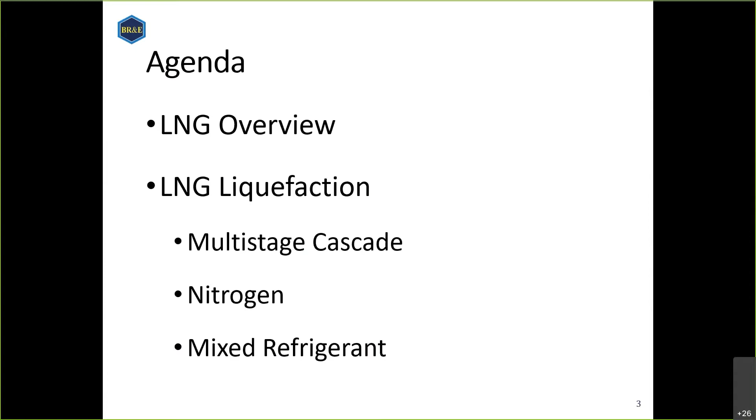So just to get us started, let's talk about the motivation for LNG. Why would we want to liquefy natural gas? The idea here is that gas is a very good energy source. It's clean, it has a much lower carbon footprint than, say, coal. The problem is it's not very dense. I mean, it's a gas, right? And so it's difficult to transport.

If you want to transport gas around and use it as a fuel, you need something like a pipeline to put it in and deliver it to consumers. And in many places, there's simply not a pipeline that you can put gas into. So the idea behind liquefied natural gas is that you can liquefy the gas, which reduces the volume by 600-fold. Once the gas is liquefied, you can move it to where it needs to be, re-vaporize it, and then send it to consumers through a pipeline at that point.

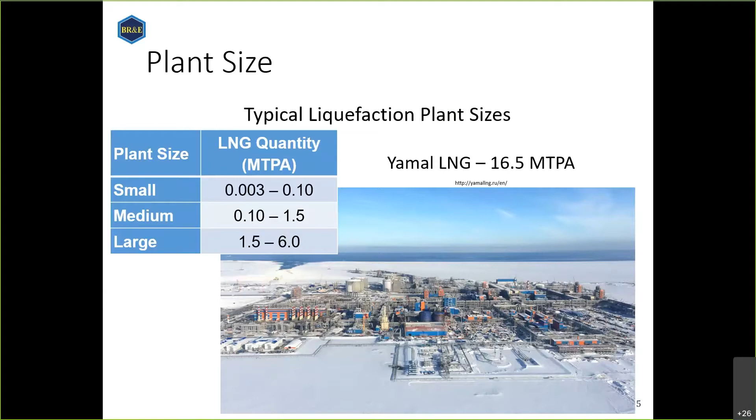Now, when it comes to actually producing the LNG, what are we going to have to do? We're going to start with gas coming out of a well, and we've got to think about two things. First, that gas is still going to need to meet our customers' needs. If we want to ultimately take this gas and put it into a pipeline for consumers or industry to use, they're going to have some specifications that we need to meet, things like the total sulfur content, the total water content, and the heating value. So we may need to do some processing to get those things in line.

For instance, for the heating value, we may need to do some dew pointing and remove heavy ends. The other thing is that because we're liquefying this natural gas, we're going to be operating at cryogenic temperatures, very very cold temperatures. That means there are some considerations from the processing side of things. One concern is that we could have solids form in our heat exchangers or piping during liquefaction because of those cryogenic temperatures. So we tend to be concerned about things like the carbon dioxide content, and in fact at the temperatures we're operating at, we can even see some hydrocarbons start to freeze out. We'll discuss this a little bit more in just a moment.

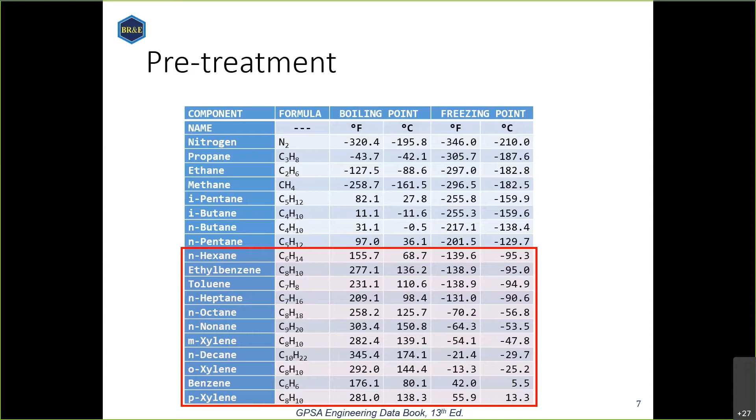And in ProMax 5.0, we've actually added a tool that lets you predict solids formation point for these species, for any species in an LNG process. Now, this is a brand new feature, and it hasn't been fully integrated into the Visio part of the graphical user interface. And so right now, this tool lives in an Excel spreadsheet.

Heating value is another thing that we've got to think about when it comes to the gas. We've got to remember that ultimately this gas is going to be put into a pipeline somewhere, and they're going to have some specifications on things like the heating value or the Wobbe index. If you haven't heard of the Wobbe index, it's basically the gross heating value divided by the square root of the specific gravity.

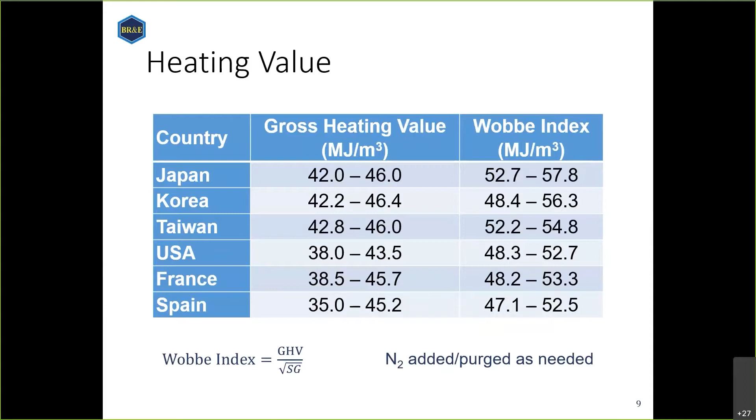And it's just a really good way to discuss the interchangeability of fuels. The idea is if you have a burner that's designed for a gas that has a given Wobbe index, you can use a slightly different fuel gas. As long as it's got the same Wobbe index, it should work just fine.

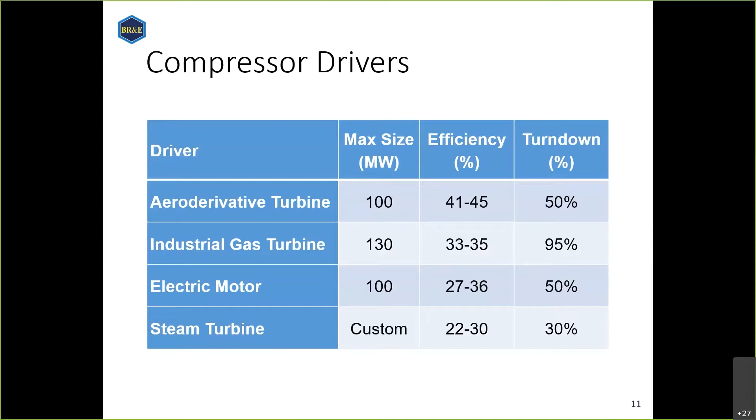Of course, cooling and condensing is also important. A lot of times these facilities are located on the seaside by the ocean, so seawater is often available for cooling, and that's pretty common in large-scale facilities. For instance, in that picture of Yamal LNG, you could see the sea in the background.

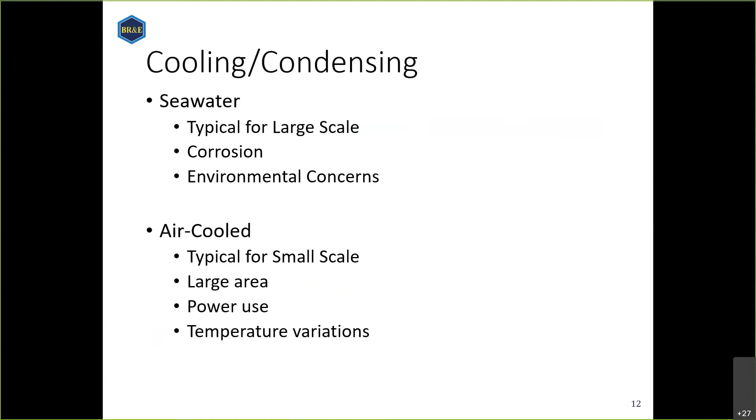Now, you can also use air coolers for cooling. That's fine. They do require perhaps a bit more power and they have a larger footprint, but both are used, both are possible.

For the expansion step, what we're typically going to use is an expansion valve, but there are some liquefaction processes that use turbo expanders. These are a bit more sophisticated rotating equipment, so more expensive than a valve. But it can be really useful if you've got a process where you don't have a refrigerant that condenses, like nitrogen. We're going to take a look at what a nitrogen liquefaction process looks like later today.

Now, when we talk about our heat exchange where the liquefaction is actually occurring, the liquefaction is going to occur in the main cryogenic heat exchanger. So you may see that referred to in the examples today as the MCHE.

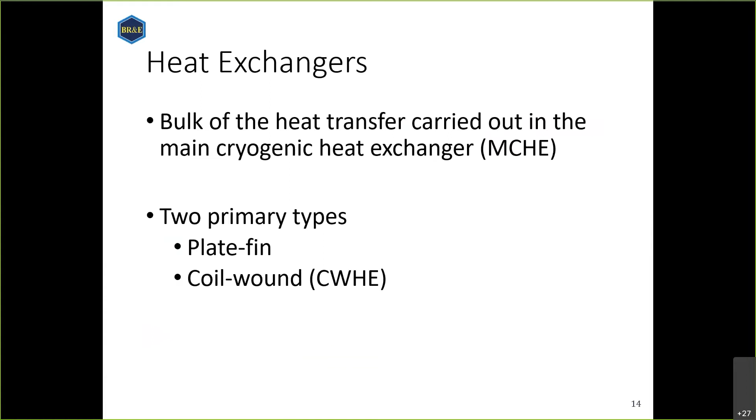There are really two types of heat exchangers that we use for liquefaction of LNG: plate fin and coil wound. Plate fin heat exchangers are sometimes also called cryogenic heat exchangers or brazed aluminum heat exchangers. These exchangers have very, very large heat transfer areas, and they're typically kept in a big insulated box that is very appropriately called a cold box. That cold box is full of some insulation like perlite and vacuum sealed.

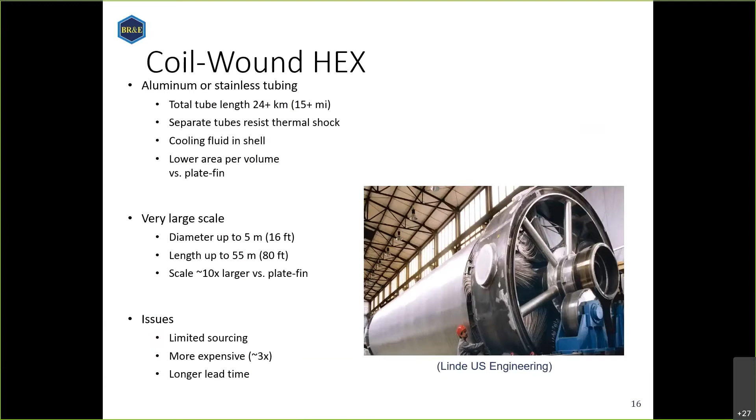Coil wound heat exchangers are also used, and they're more common in the larger facilities. The brazed aluminum exchangers are perhaps more common in the smaller facilities, and these are pretty amazing pieces of equipment. They're expensive, they're very big, but they're really impressive feats of engineering. If you just look at that picture, this is pretty cool, pretty cool exchangers. The bullet point up there points out that you can have 24 kilometers of tubing, which is just incredible. So anyway, we're going to do our liquefaction in the main cryogenic heat exchanger, and then after we've produced our LNG, we've got to store it somewhere.

So we've got a storage tank here. We're going to store the LNG at very low pressure, almost at atmospheric pressure, in an insulated storage tank. And there's going to be some boil off because there's a huge temperature differential between this fluid and the outside air and ground. It is insulated, of course, but we're still going to have some boil off.

But that's okay because we need that boil off gas to use for perhaps driving the compressors or as fuel gas anyway.

And then finally, we're going to have shipping. So these are just some ships that are used for transporting LNG. You can see there's different ways that you can design the tank. In the ship on the right, we've got spherical tanks. On the tank on the left, we've got more of a cube shape for the tanks.

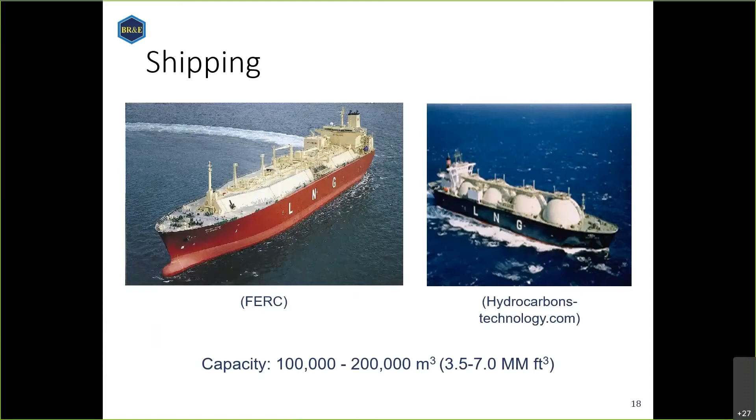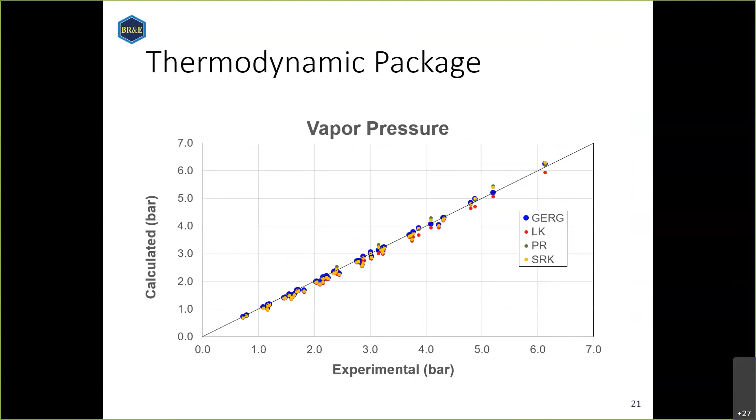The other limitation with GERG is that it's missing a component that we actually use a lot in LNG. Take a look at those components in the lower left-hand corner that are supported for GERG. If you can figure out what GERG is missing, let me know in the chat. I'll give you a few seconds to think about it. There's one component that's very important in LNG liquefaction that's missing. Do you know what it is?

The one that I was thinking of was actually ethylene. Now, ethylene is not something that we're going to have probably in our gas that we want to liquefy, but a lot of times we want to use ethylene as a refrigerant. And so if we've got ethylene as a refrigerant, that also makes things with GERG a little bit tricky. So there are some good reasons that we would want to use one of the equations of state.

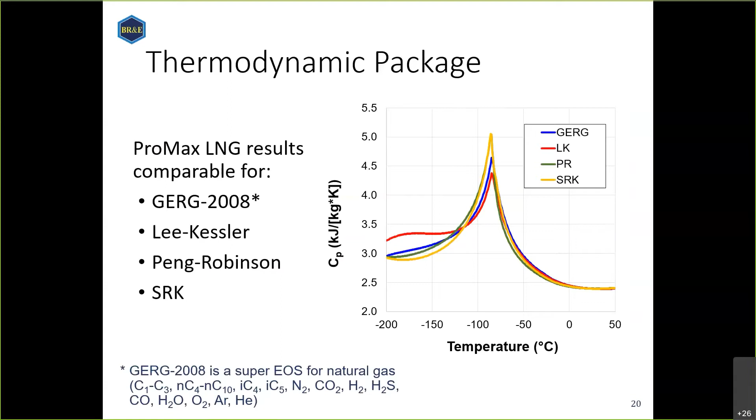And what we're going to kind of default to for the liquefaction here, I think, is at least in the examples that I showed you today, is Peng-Robinson. And if you look at how close Peng-Robinson tracks the GERG, again, at low temperatures, it makes good sense to use it. Okay, so here's the first process that I wanted to show you today.

Now, the first question is, why do we need multiple different refrigerants? And then the second question is, how did we choose these refrigerants? Well, the reason we need multiple refrigerants is simple. If you think about a propane refrigeration system, we couldn't liquefy natural gas using pure propane as a refrigerant, right? Because the coldest that we can get pure propane is about -35, -40 degrees Celsius, somewhere in that range. For LNG, the temperature that we're typically trying to target is about -155 degrees Celsius.

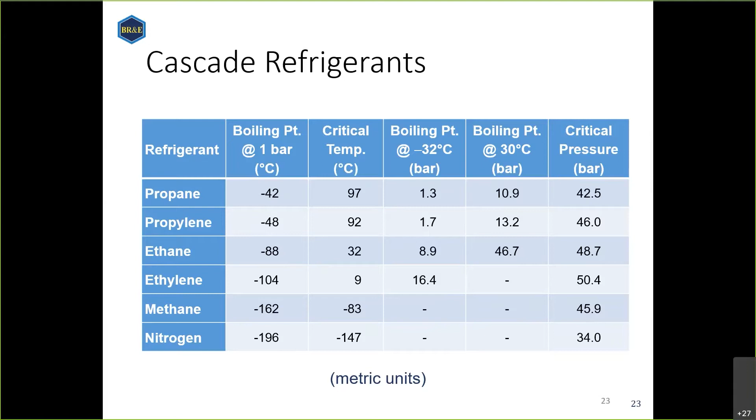For propylene and ethylene, that's not true—there's not necessarily going to be an ethylene cracker near our liquefaction facility. So what we're going to have to do is actually purchase that ethylene, bring it on site, and store and manage it. It's worthwhile for ethylene, but for propylene, typically it's not really worthwhile to deal with that. We'd rather just use pure regular propane, which is available and common. So anyway, that's the motivation for using propane, ethylene, and methane.

Now, the other option we have is the mixed refrigerant process. Rather than having multiple different refrigeration loops with methane, ethylene, and propane, we can create a mixture of methane, ethylene, propane, butane, and have a single loop. What that's going to do is give us a refrigerant curve that is no longer just a flat line, and we're actually able to get the heating and cooling curves to line up with each other.

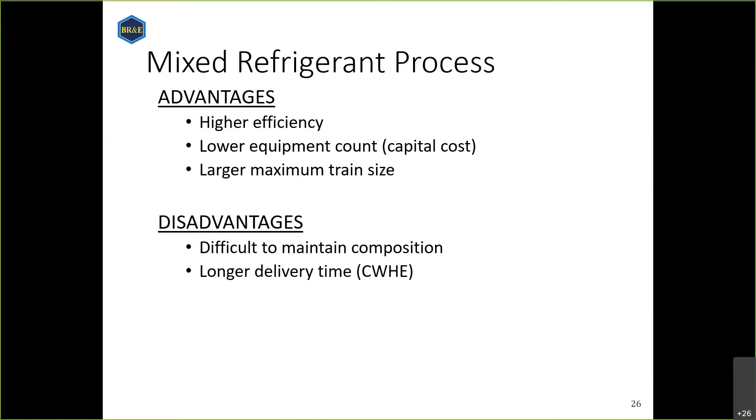The advantages of having a mixed refrigerant process are that we've got higher efficiency, we get those heating and cooling curves really close together, and we've got lower equipment count because we only need one set of compressors instead of 3. But there are some challenges: it's difficult to maintain the composition, and if we need to use something like a coil wound heat exchanger for this, that can introduce some problems.

But this is basically what a mixed refrigerant process would look like, and you can see this is much simpler looking than that Cascade process. Typically, this is going to be used for smaller facilities, less than 1.5 megatons per annum.

Finally, I've got a picture of the nitrogen cycle here, and this is a lot like the single mixed refrigeration process — we've just got a single refrigeration loop. Nitrogen's our only refrigerant, which means we've got one heat exchanger, so we get that benefit, plus the benefit of the Cascade process, which is that we only have one refrigerant to worry about — just pure nitrogen.

And nitrogen is something that's very easily available. It's in the air around us. I'm sitting in a bath of nitrogen right now, so you can produce your own nitrogen and use that to load your charge in the refrigeration loop.

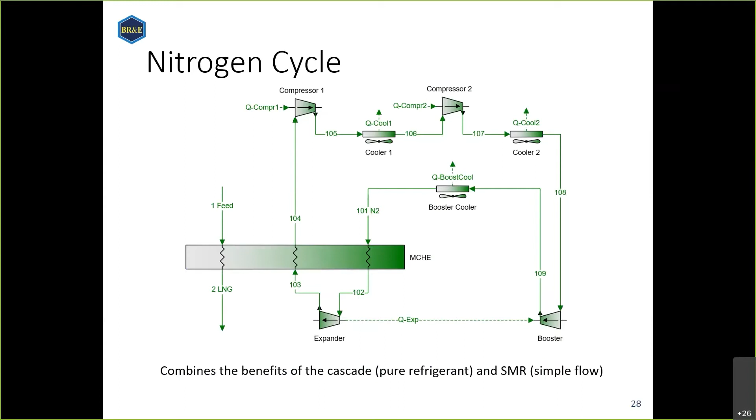The difficulty here is that, like I showed you on that table earlier, the nitrogen cycle is just not very efficient. One of the reasons is that it's kind of hard to get those cooling curves close together. With our mixed refrigerant process, we've got a lot of control over the heating and cooling curves — we can tune the refrigerant composition to get those curves really close together. But with nitrogen, we don't have that flexibility.

Nitrogen's curve is just going to be a straight line of constant slope because it's just sensible heating — there's no latent heat involved. And because those curves are so far apart at some places, the process ends up being less efficient.

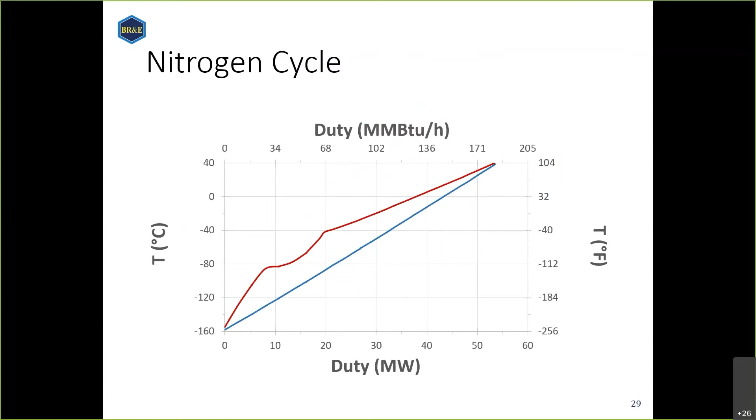Now, there are ways to overcome that. You can use something like this dual expander configuration, where we have a warm expander and a cold expander. In that case, you end up with 2 curves for nitrogen, and here we've managed to get these curves a little bit closer together, but you can still see that there are some areas where the curves are quite far apart.

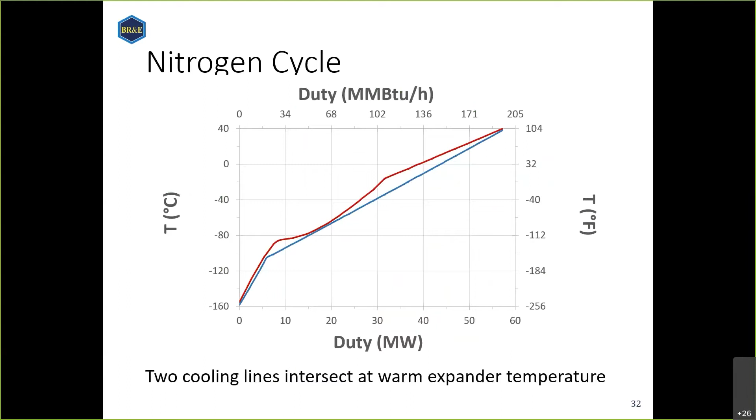So we're going to take a look at all of these in ProMax now and see what it actually looks like in simulation. The first thing I want to show you — I've got a blank ProMax project here, and I'm going to open an LNG example. We've got a huge library of built-in examples always available for you to reference, and they're also good starting points for your own simulation work. I'll show you how to get to those: go up here to File, and then click on ProMax.

And from here, I can click Open Example Project, and this is going to open our examples library. In the example I'm going to look at, I'm going to go into the folder midstream, and then into the LNG folder. You can see we've got several different examples here. We're going to be looking just at these examples today.

The first one I'm going to show you is this LNG Cascade process. Let's open that up. First of all, I'll help get you oriented. We've got our feed here, so this is going to be our gas stream that we'd like to liquefy. You can see that we've got a flow rate of 1 megaton per annum. We're coming in at 50 bar and 40 degrees Celsius.

And if I open this up, we can just take a quick look at the composition. You see that we've got 88% methane, 7% ethane, 3% propane, a bit of butane, and some nitrogen.

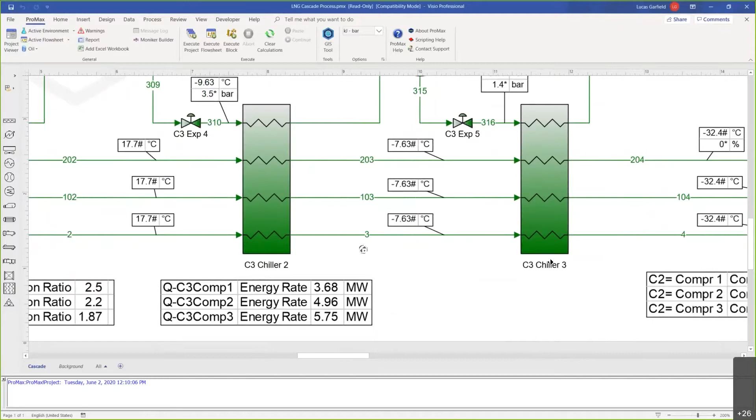What we do is we go through multiple different exchangers, getting cooler and cooler each time. So we go through our propane chiller, that takes us down to 17.7 degrees Celsius. We go through a second propane chiller, that takes us down to negative 7.63. We go through a third propane chiller, that takes us down to negative 32.4.

We continue on through 2 different ethylene chillers, that gets us down to negative 96. Finally, we go through 3 methane chillers, we get to a final temperature of negative 155 degrees Celsius. And then we flash down to our final storage pressure of 1.4 bar absolute. You can see that that ends up, if I open that stream, vaporizing just a little bit. So there's about a 3.3% end flash here, and our final temperature is about negative 158 degrees Celsius.

Now, this is a lot more complicated than what I showed you on the slide. The reason for that is because we're actually using economizers in our refrigeration loops. In fact, here in our propane refrigeration loop, we have 2 different economizers. It's pretty common on simple propane refrigeration skids to have 1 economizer. Here we actually have 2.

If you're not familiar with what economizers do in refrigeration processes, the idea is that we're mostly interested in using the latent heat of this refrigerant. So the actual refrigeration process occurs isothermally at whatever temperature we expand the gas to. As we expand the refrigerant, it's going to liquefy, and then we're going to extract the latent heat from the liquid, but that all occurs at constant temperature. And the idea here is that because we know we have to recompress, we don't really want to spend energy compressing refrigerant that doesn't get used for cooling.

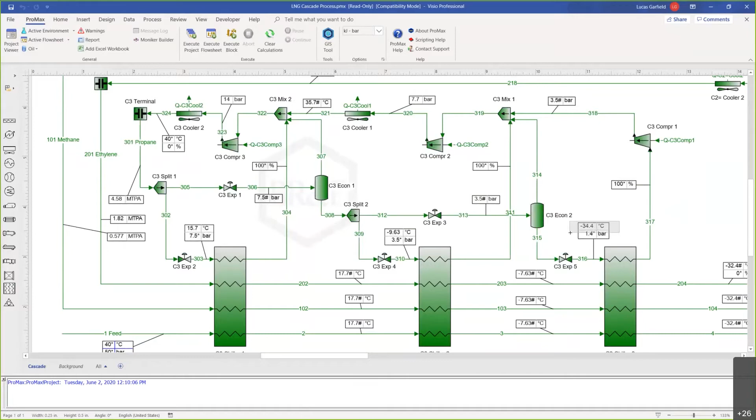And here we're actually expanding to 2 intermediate pressures. We're expanding to 7.5 bar, which drops us down to 15.7 degrees Celsius — again, this is for propane — and to 3.5 bar, which drops us down to negative 9 degrees Celsius. And then finally to 1.4 bar, which drops us down to negative 34.4 degrees Celsius.

We set the exchangers up based on approach temperatures. What we're assuming here is that we have a cryogenic heat exchanger, so this would be, for example, one of those brazed aluminum heat exchangers. We'll assume that we can get a very good approach temperature, perhaps 2 degrees, and we've configured this model to have 2-degree end approaches.

Let's just take a look at the first propane chiller and see what I mean. If we open this up, then go to the Process Data tab, and click here on Heat Transfer, you can see that we've got a minimum end approach temperature of 2 degrees Celsius. Let's take a look at the plot for this exchanger and see what that looks like. I'm going to click here on Heat Transfer, which is going to show me the 2 curves together, and I can see that, indeed, I've got that 2-degree approach on the cold side.

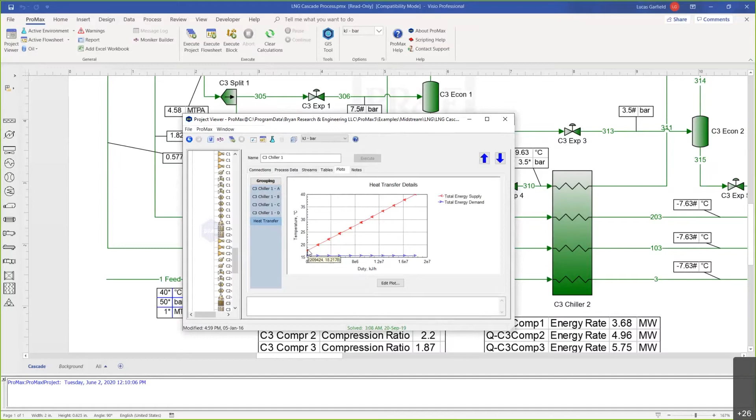The propane, our actual refrigerant that's entering the system, it's here in stream 303. Its temperature, 15.7 degrees Celsius, is entirely a function of the pressure that we expand to. We've chosen to expand to 7.5 bar, and I know that because there's an asterisk here in this callout.

The asterisk indicates to me that the user has defined that value. In fact, if I open this stream, you'll see that the pressure is here in blue. Again, in ProMax, blue indicates that the user has defined this value. And the temperature is just a result of the expansion, so we end up at 15.7 degrees Celsius here.

To get our 2-degree approach, we set the temperatures in each of these outlet streams to 17.7 degrees Celsius, assuming we get that 2-degree approach. Just to zoom out so you understand what all of those streams are: one is the feed, which is being chilled, but we're also chilling our methane refrigerant and our ethane or ethylene refrigerant.

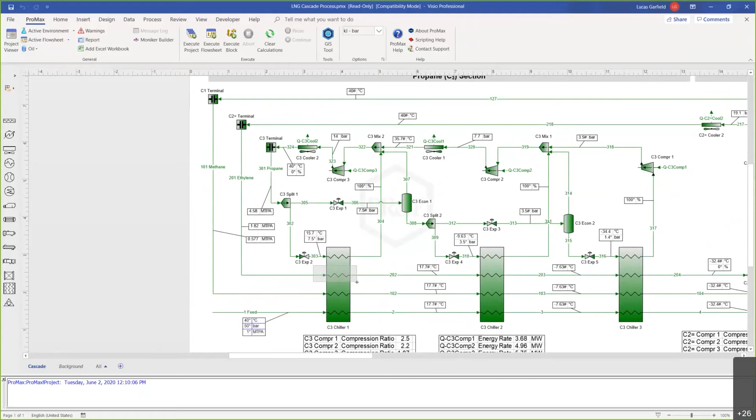The way that we set these temperatures up is using simple specifiers, which are a type of calculator in ProMax that can set one value based on the value of something else.

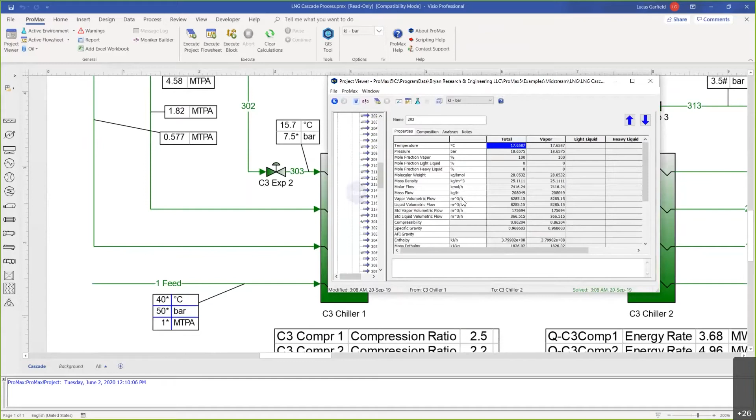If I open stream 202, the reason I can immediately tell these are set using a calculator is because there's a hash mark or pound sign on the callout. That indicates to me that a calculator is setting this value. And indeed, if I open stream 202, I see a solid blue background under the temperature, which is another clue that a calculator is here.

When I right click on this value and click show calculator, that's available because the background is blue — there's a calculator installed. If I look at what this is doing, this calculator takes a look at this independent variable, C3 chiller 1 temperature natural gas, and if I hover over it, a pop-up comes out.

This is a local reference to the temperature of stream 2 — you can see that in the pop-up that comes up. So basically what this calculator is doing is saying: set the temperature of this stream, stream 202, equal to the temperature of stream 2.

Similarly, if I open stream 102 and look under its temperature field, right click again and click show calculator, we have the same reference — it's referencing stream 2. So I have a calculator on stream 202's temperature that sets it equal to stream 2's temperature, and a calculator on stream 102's temperature that does the same.

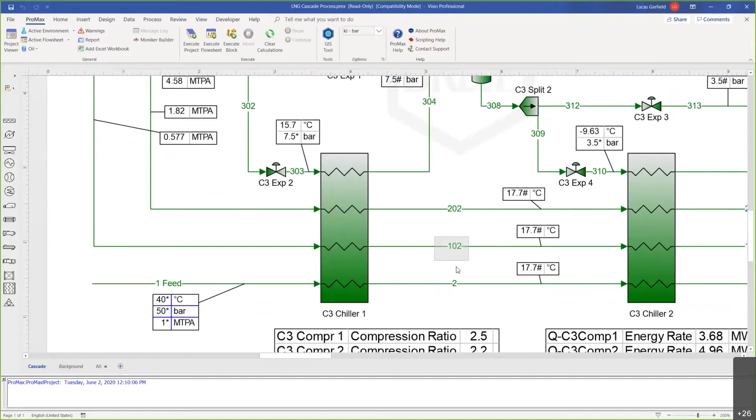Then if I open stream 2 and right click at its temperature, here it's set up a little differently. The variable here is actually taking a look at stream 303's temperature. If I hover over this, you can see it's pointing to stream 303's temperature. Then we add our desired approach to that value and set that as the temperature for the stream. Now this whole system is fully automated.

I could do something, for instance, like instead of expanding to 7.5 bar, expand simply to 8 bar instead — all of those temperatures would update for me automatically, and I would still have my 2-degree approach. So you can see now, when we expand to 8 bar, we're getting to 18 degrees Celsius here, and these temperatures have all updated automatically.

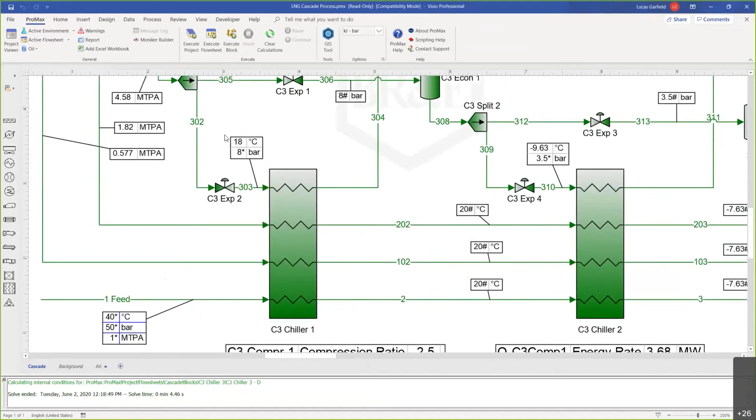So once you set those specifiers up on your outlet temperatures on your heat exchanger, everything is handled for you automatically, based in this case on what we've set as the expansion pressure here.

Now, what if we wanted to look at the complete grand composite curve? I showed you the composite curve for this individual exchanger when I opened it and went to the plots tab, but what if I wanted to see all of those curves overlaid on each other? We've got a lot of exchangers here — 8 different exchangers.

Well, we have a tool for that. It's located in what we call our property stencils. Basically, these property stencils are tools that run on top of ProMax and execute scripts that we've written, and we've written a stencil that produces the grand composite curve for this exchanger.

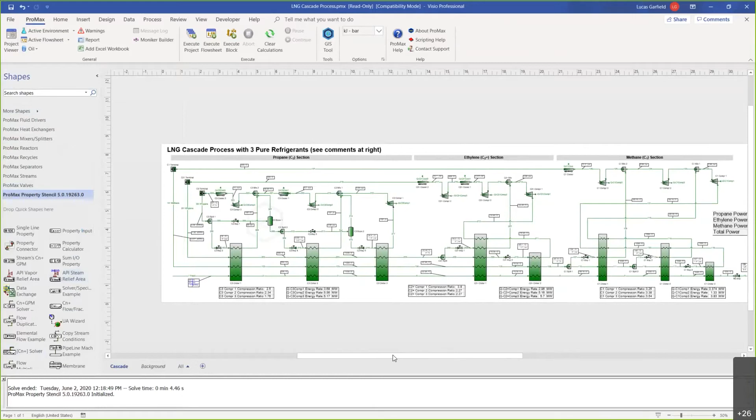Now I'll go ahead and load that. I'm going to click here on More Shapes, and click on Open Stencil. Then I need to navigate to where I have my composite stencils, so I'm going to go to the folder where I've got this stored. Just bear with me for a moment here.

I've got this folder holding this composite heat stencil. This stencil is available to you if you request it. In this case, it does not ship with ProMax, but we can supply it to you if you request it. So I'm going to open that.

When I drag this composite heat stencil out onto the flow sheet, a pop-up is going to appear asking which exchangers I'd like to include in the plot. I would like to include all of them, so I will select all of them and click OK.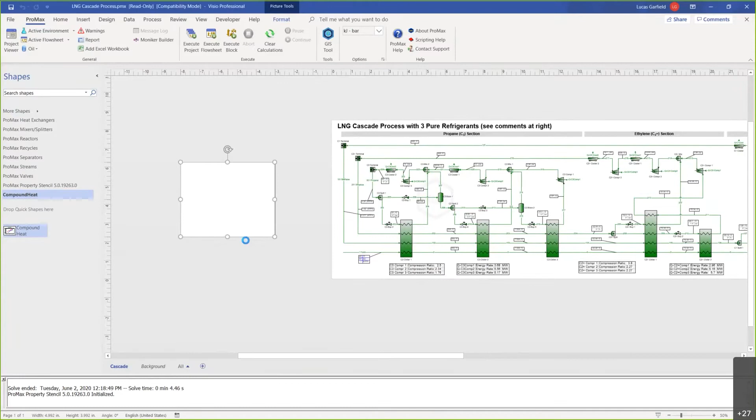And here we go, here's our composite exchanger curve. I can see for each one of those exchangers what my curve looks like.

You can kind of get the idea. I've mentioned this briefly before - one of the things that's going to really affect the efficiency of this process is how close we can get those heating and cooling curves together; the closer they are, the more efficient our process is going to be. By breaking our refrigeration loops up into multiple steps, for instance having 3 stages of propane refrigeration or 3 stages of methane refrigeration, it helps us squeeze those curves closer together.

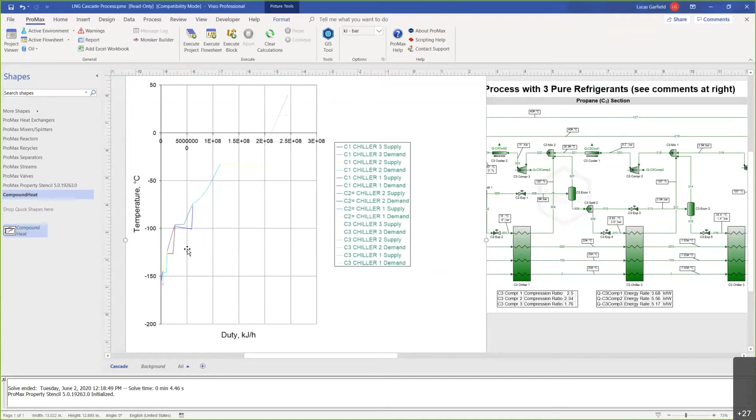So that's how you do a composite exchanger curve. This is what a cascade refrigeration process looks like. We're not going to go into too much more detail on this because the whole idea today is to give you a general survey of what's possible in ProMax.

Let's take a look now at a mixed refrigerant process. Oh, actually, there was one more thing I wanted to show you here - the LNG Solids Excel spreadsheet that I mentioned earlier.

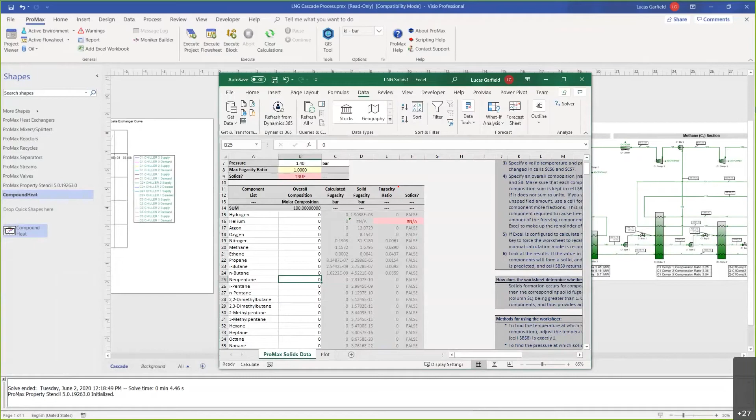I've got that spreadsheet open here. This is what it looks like when you open it. There's a set of instructions over here on the right, but it's really easy to use. All we have to do is specify our property package, our temperature in units of Celsius, our pressure in units of bar, and then the composition.

Right now I don't have anything in here for the composition, so let's go ahead and open my feed stream and take the values from that feed stream and put them into this calculator. So I have 88% methane, 7% ethane, 3% propane, 0.5% of each of the butanes, and then 1% nitrogen.

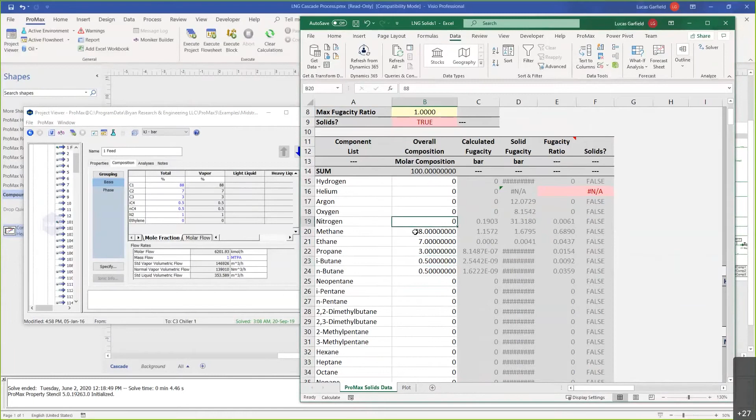I'm going to go ahead now - the way this spreadsheet is set up, it's not set to calculate automatically because the calculations can be fairly computationally intensive. So we're using a feature that I didn't actually know about in Excel until I started using this spreadsheet: if you click on the formulas ribbon, there's a section where you can set the calculation options.

We've actually set the calculation to manual for this Excel spreadsheet, which means when you enter values, they don't update automatically like you'd normally expect. So to get this to run, I need to click this Calculate Now button - so that's what I'm going to do.

But first, I want to go ahead and set my temperature and pressure to be correct. We said we were trying to get to about negative 155 degrees Celsius, and in fact the end flash was negative 158. So I'm going to set the temperature here to negative 158 for our end flash, and click Calculate Now.

This calculates the fugacity ratios for a hypothetical solid phase for each component, and then tells us if it predicts the presence of solids. Here we see that the maximum fugacity ratio for any of our given components is 0.69 - that's with respect to the phase that's present and the hypothetical solid phase. If it's less than 1, we won't have solids form; if it's equal to 1 or greater, we will have solids form. So let's try to add something that would potentially cause solids.

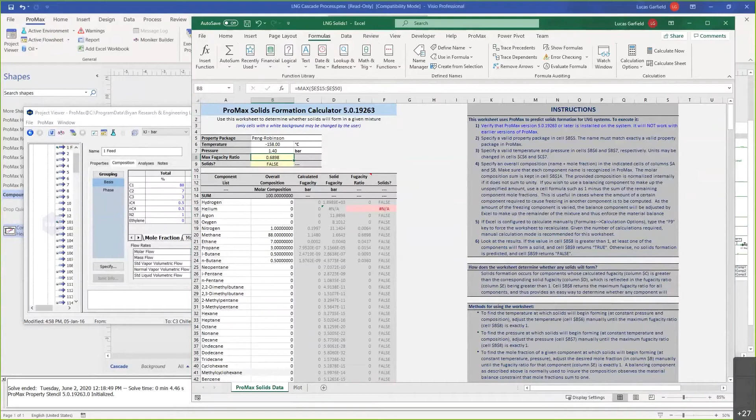Let's try to add benzene. I'm going to propose that we add about 100 ppm of benzene. Now, when we do that, what we're going to have to do is make sure that our composition still sums up to 100.

So if I come down here to benzene and add, for instance, benzene as 0.01 mole percent, my molar composition now is not going to be equal to 100 anymore. It still says 100, but remember that's only because the spreadsheet's not calculating automatically. So this actually right now sums up to 100.01, and I've got two options here.

I could normalize this, that would be okay. Or I could just use methane, our biggest component, as kind of a balancing component. So I could say methane is actually equal to perhaps 88% minus however much benzene we have. And then this is always going to sum to be 100%.

And I can kind of start to tweak and play with the amount of benzene. So if I had 100 ppm benzene and I click that Calculate Now button, aha, look at this. We're being told that the maximum fugacity ratio is 15.9, that solids will form, so we've got this red warning, and if I go down here and look at where the solids form, I see, indeed, it is for benzene.

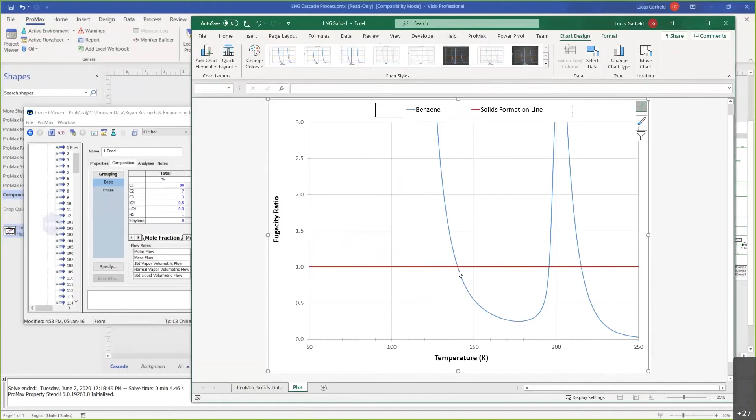But in any case, the temperatures that we're working with, it would be a problem. And actually, that plot comes from this table. So this table is basically showing you for each degree Kelvin that we're at. We've got degrees Celsius here as well. If we go down to where we were at, we're trying to get to negative 158, and the fugacity ratio there is 16. So we've got solid benzene.

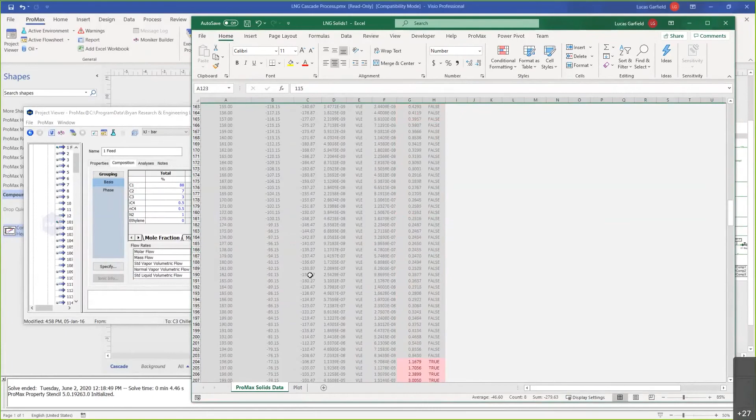So that plot is basically just generated from this table, and you can generate this table for any component that you want to. You can just choose the component to generate the table for from this list. And that's how this tool works. It's really useful—there's other stuff that you can do with this.

If you wanted to figure out what the minimum amount of benzene would need to be before—what I was trying to get at is, if you wanted to figure out what's the smallest amount of benzene that I could have that would cause a problem, you could start, for instance, adjusting this benzene fraction.

I could say, okay, well, if 100 gives me solids, what if I went to 50 ppm? And again, I'm just going to come up here to formulas and click Calculate Now, and I see at 50 ppm I've still got solid benzene, and this will actually work with the Excel solver.

So I could run solver, for instance, and I could say, set the objective cell, the max fugacity ratio, equal to a value of 1 by adjusting the benzene concentration, subject to the constraint that it's greater than 0. And if I click solve here now, and let the Excel solver run for a moment, it should pretty quickly find for us exactly how much benzene would cause a problem at negative 158 degrees Celsius, 1.4 bar.

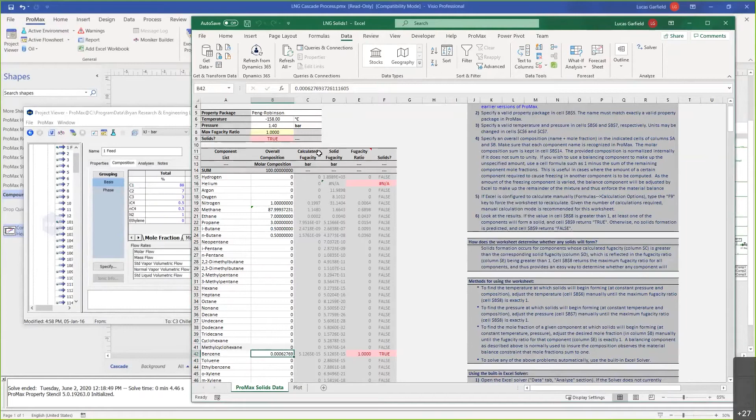I just want to point out also that in ProMax, if you've ever used us for gas processing, you should know that ProMax is always checking for solids formation in streams, in pipelines, and in columns. It's looking for dry ice, frozen CO2, hydrate, and solid water, and ProMax will issue warnings about all those things. However, ProMax itself, in the Visio GUI, will not issue you a warning about the potential for having frozen benzene. So that's something you've got to check yourself using that Excel spreadsheet I just showed you.

Okay, that's it for the Cascade refrigeration. Let's take a look at another process. I'm going to go back to File, click on ProMax, and open another one of our examples. I'm going to open again our midstream folder, LNG, and now let's take a look at that single mixed refrigerant cycle. Let's see what a mixed refrigerant process would look like in ProMax.

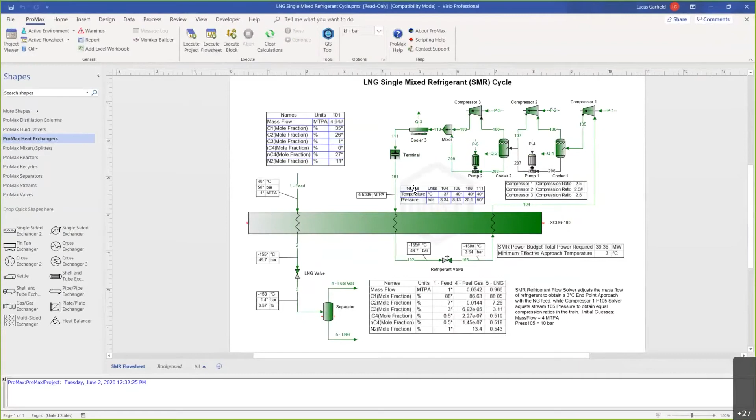This is much simpler, agreed? We've just got a single refrigeration loop, and that means it's capital-wise much simpler. Again, the feed is 1 megaton per annum. We're using the same gas here as in the previous example, 88% methane, 7% ethane, etc. And we're going down to the same end flash, negative 155 degrees Celsius at our high pressure, and then end flashing down to 1.4 bar, which gets us a temperature of negative 158.

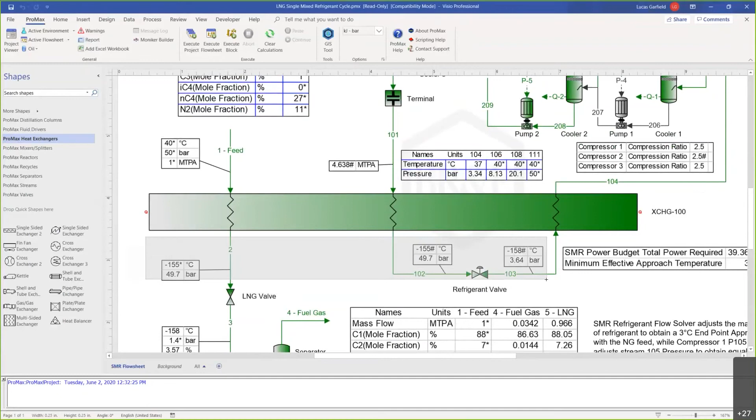We've set this up a little bit just like before. Notice here that on the cold side, we are basically assuming a 3-degree approach. So after expansion, our refrigerant gets to a temperature of negative 158, and it's kind of cooling itself here. This is auto refrigeration, and then this is the refrigeration of the LNG. So we have a 3-degree approach on the cold side, and on the warm side, we've also got a 3-degree approach.

We're not explicitly showing that right now, but if I were to copy and paste this call out to show you the temperatures here, we're at 40 degrees Celsius. Our refrigerant, after compression, is coming into the exchanger at 40 degrees Celsius, and then it's leaving at 37 degrees Celsius. And the way we've actually set that up in this simulation is a little bit interesting.

We are using what we call a solver to set the flow rate of the refrigerant. Now, in the previous example on the Cascade refrigeration page, I didn't explicitly discuss this, but the flow rates of all of the refrigerants were set by the duty requirement. Here it's a little bit different.

Here what we're doing is we're setting the flow rate of refrigerant here in stream 101. And I know that, again, because I see the flow rate here and I see that hash mark. So we're setting the flow rate in stream 101 such that stream 104's temperature is 37 degrees, and we're doing that because it gives us a 3-degree end approach here on the hot side.

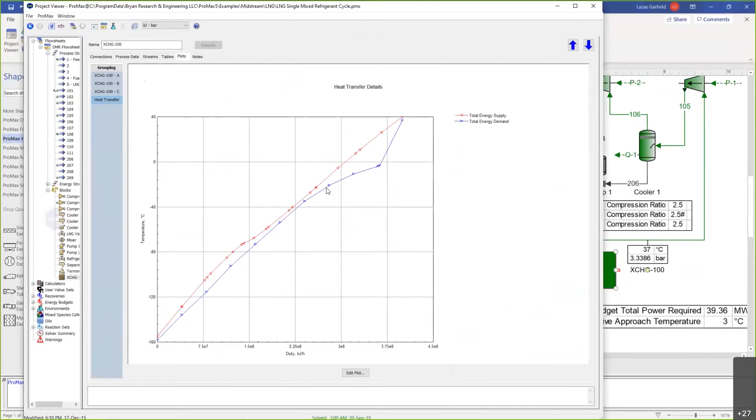Now, just to prove to you that I've got that 3-degree approach and 3-degree approach, let's open the heat exchanger itself and go to the plots tab. And here I see that on the cold side, I've got that 3-degree approach, and I've got a 3-degree approach here as well. Notice how this curve is really pinched up right against the other curve, it follows it pretty closely. And that's really beneficial from a perspective of efficiency.

How did we actually achieve that? If I open stream 101, that's where we've set the composition. If I click on composition here, this is the mixed refrigerant we're using. It's a mixture of methane, ethane, propane, butane, and nitrogen.

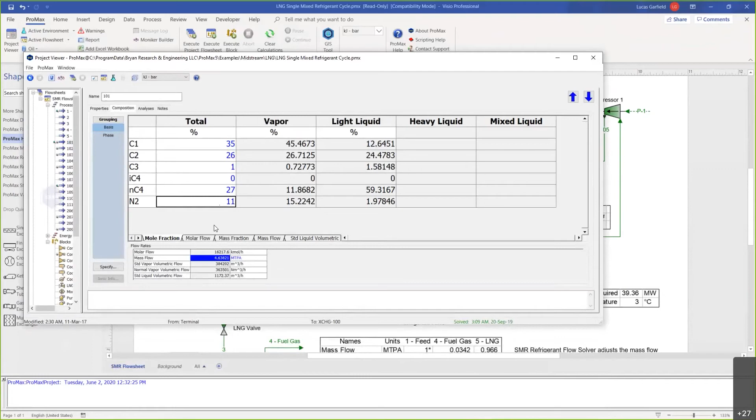Let's take a look at how we set up the flow rate. If I look at the flow rate here, it's 4.6 megatons per annum. How did I get that value? Well, the solid blue background is my clue that there's a calculator at work here.

Before, what I showed you was a calculator called a specifier, that was for the Cascade process. Here, we're actually using a calculator called a solver. The difference is that the solver is actually an iterative calculator. It's kind of going to use a guess and check method.

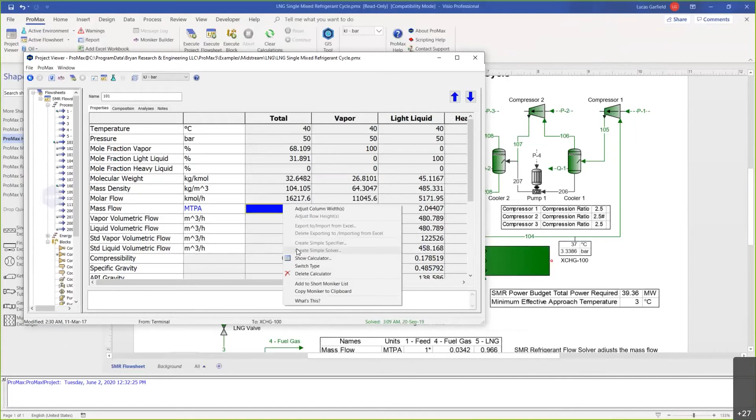So if I open this up, what it's doing is taking a look. We've got local variables here. We're looking at the temperature of the feed stream and then the temperature of stream 104. So those are our two local variables that we use in this solver. That's just the temperature of the feed, which is 40 degrees Celsius, and the temperature of stream 104.

What we want to do is have those two temperatures be within 3 degrees of each other. We want an approach of 3 degrees. So we've got this expression up here: the temperature of the feed, which is 40 degrees Celsius, minus the temperature of stream 104, which is currently 37, divided by 3 minus 1.

This is perhaps a little bit mysterious until it's explained that what the solver does is run a root finding algorithm. As a root finding algorithm, it's going to try to adjust whatever it was installed on. In this case, it was installed on the refrigerant flow rate. It's going to adjust the refrigerant flow rate until it finds the root for the expression that we've written in this box. The way we've set this expression up is such that the root will occur when the approach is equal to 3 degrees, and this is going to be an end approach. So that's how this works.

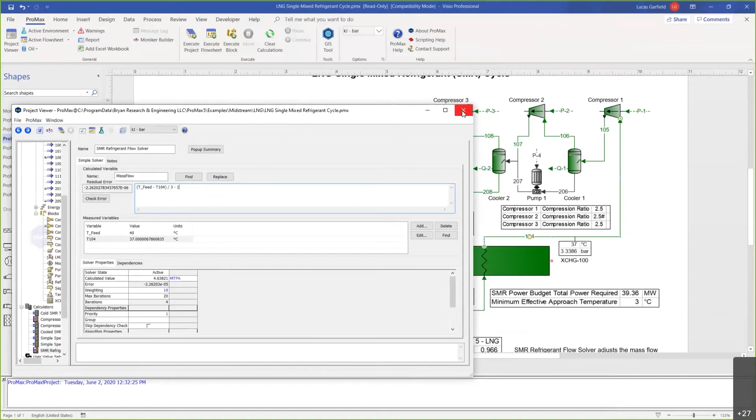Let's do an experiment here. Let's say you're an engineer, or let's say I'm an engineer, responsible for creating a simulation of a process that's actually running. Let's say this gas composition that's in here now is the design composition, but loading these systems is actually not trivial. It's not easy to actually get this charge in there at the exact composition. So let's say they just tried to load this up and the actual composition deviated a bit from the design composition. So I'm going to change this composition.

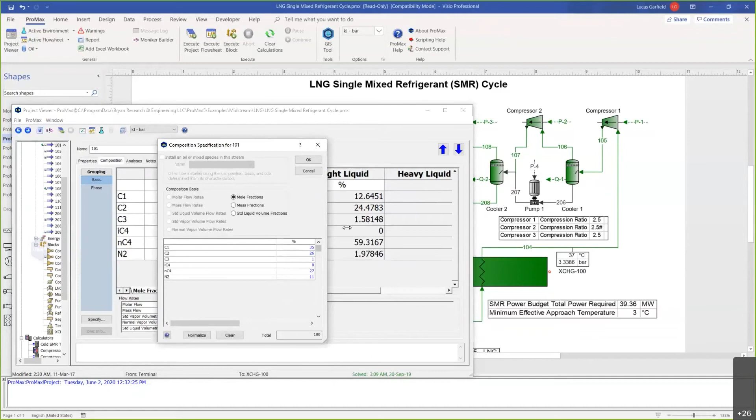Let's just pretend that even though this was what we designed for, what really ended up in there was 30% methane and 32% butane. So we've got a little bit too much butane, not quite as much methane. This is just a simple thought experiment, so we'll leave the ethane, the propane, and the nitrogen the same.

Let's see what happens. Now, I've still got that solver in place, so that solver is still going to try to get me those approach temperatures. And that means the flow rate's going to change a bit.

All right, so the flow rate dropped down to 3.9. I do still have my 40 degrees Celsius here and 37 degrees here, so I'm still achieving my end approach temperature. But now the exchanger's yellow. Yellow is always something you need to watch out for in ProMax. Yellow is like a caution flag. It's telling you to take a look at the warnings, take a look at the message log.

And if I look down here at the bottom in the message log, I can see this warning saying that exchanger 100 contains a negative or close endpoint or internal approach temperature. Rating is not possible. Let's open it up and see what's happening.

If I look at my supply and demand curve plot, I see I've actually got a pinch in the middle now. So even though I've got a good end approach temperature here and a good end approach temperature here, there's an internal pinch, and that's why I've got this yellow block, and it's a problem. Now this is thermodynamically impossible, so we need to do something to fix this. We've got to get rid of this.

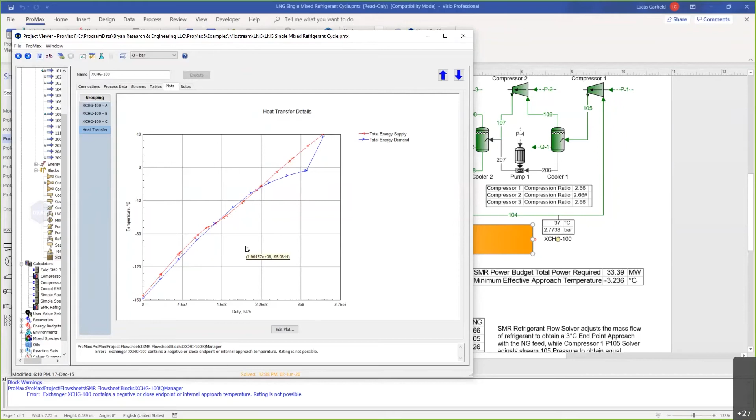One thing we might do is, instead of controlling the refrigerant flow rate such that we get the end approach temperatures to be 3 degrees, what if we controlled it such that we got the effective approach temperature to be 3 degrees? I'll show you how we could set that up. I'll go back to my refrigerant stream where we've set the flow rate in stream 101, and I'm going to go back into the solver. Now what I'm going to do is come up here and put two forward slashes in front of the original expression.

That creates a comment, and so now, because I've got those 2 forward slashes, ProMax is just going to ignore anything that it sees on this line. I'm going to create a new line and write effective approach minus 3. So again, this is a root finding algorithm. It's going to find the root when the effective approach is equal to 3.

I'm going to now go down to my measured variables and click add. I just need to create a local variable that represents the effective approach. So I'm going to open my flow - this is my property moniker tree, and I'll navigate to that block, the main cryogenic heat exchanger. That's exchanger 100 here. The effective approach can be found in this Q manager section. I'll click here on minimum effective approach temperature and give it the same name I wrote in the expression above, effective approach.

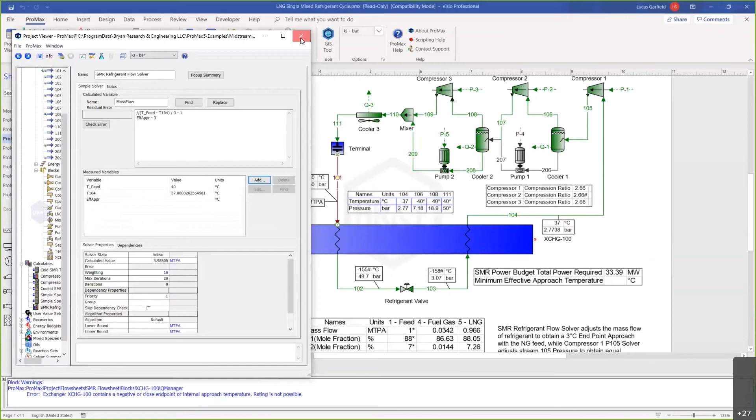Now, if I solve this, it's green now. I no longer have a 3-degree end approach. I've got 40 degrees Celsius here for the feed, and I've got 15.6 degrees Celsius here. So that end approach is no longer good, but now I've eliminated that temperature cross.

So this is something that's really useful - to use a solver to try to get the effective approaches to line up if you've got an internal pinch, and that can be really important when you're doing these mixed refrigerant processes. Okay, so that's kind of what I wanted to show you for the SMR.

I just want to show you one more process now. I want to take a quick look at the nitrogen process, and I want you to keep something in mind here. I'll go ahead and open a new instance of ProMax to do this. Note that the power we're using here is 40 megawatts, and that's perhaps not optimal because we made a change in composition and we assumed we had a mistake. But regardless of that, we're at 40 megawatts.

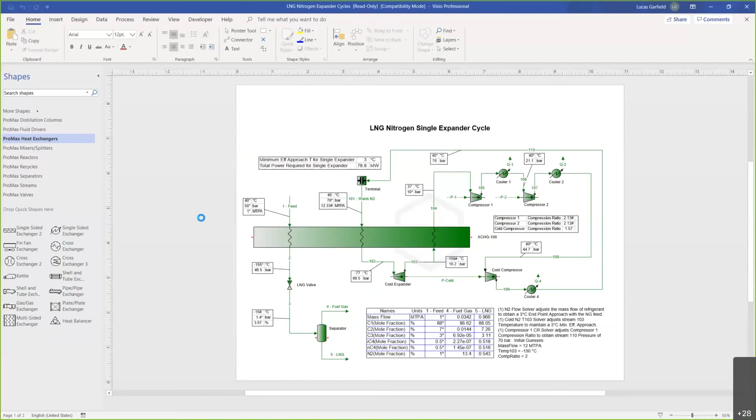Let's open an example of a nitrogen process for this exact same gas and see what kind of energy consumption it uses. So again, I'm going to go to midstream, LNG, and open this LNG nitrogen expander cycles example. Again, you have all these examples yourself - they come with any ProMax installation. Here is an LNG nitrogen single expander cycle process, and note that the total power consumption is 78.8 megawatts. This is for the same gas, 1 megaton per annum. So this is clearly a less efficient process.

Just a couple things I want to point out to you. We're using an expander here, and because of that we can perform an isentropic flash rather than isenthalpic - valves do isenthalpic flashes, which is what we did in the previous examples. Here we've got an actual expander, which means we also have this booster compressor we can use, and we get to cooler temperatures. But even though we're at negative 158 here, we're still in the gas phase. If I open stream 103, you can see that this is fully in the vapor phase.

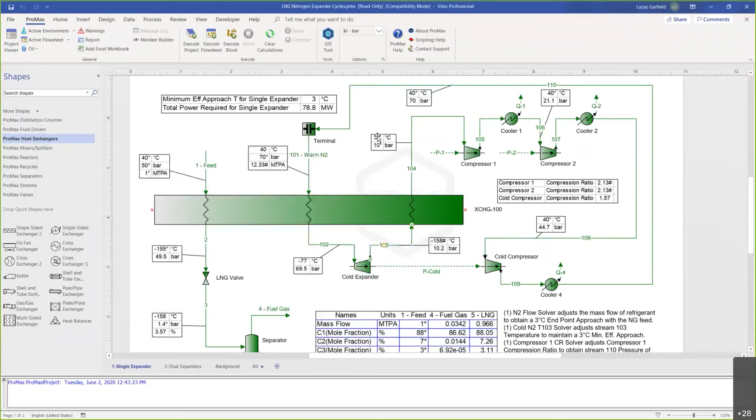The explanation for why the power consumption is so much higher here is really simple. Let's just open up that supply and demand curve - we'll go here to plots, heat transfer. And you see we've got this huge gap, right? So this is really why we've got such an enormous duty. It's just not efficient to extract heat like this.

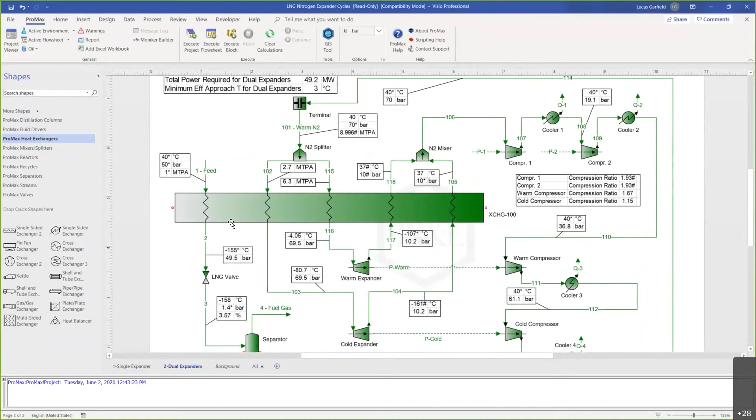Now I can show you the dual expander process here. So here we're actually going to use a warm expander and a cool expander. This is slightly more complicated in terms of how to set this up, and again, the refrigerant here is just pure nitrogen. But by going to 2 stages, we've managed to go down to 50 megawatts. If you remember, our SMR was 40 megawatts, so now we're actually starting to get competitive with the SMR.

I can open this exchanger and show you the plot. You can see here that the reason for the efficiency improvement is that we've managed to get these two curves closer together. We could play with the different temperatures, and this point right here where the slope changes is basically the temperature we're operating at.

One of these curves is from the cold expander, and one is from the warm expander. We could move around where this temperature occurred, or where this point occurred, by changing the temperatures we operate at.

But here you've got to be careful, because if we just went straight up like this, we could have an internal pinch. So that's something that can potentially be limiting, because now we've got this change in slope at this specific point, we could have an internal pinch.

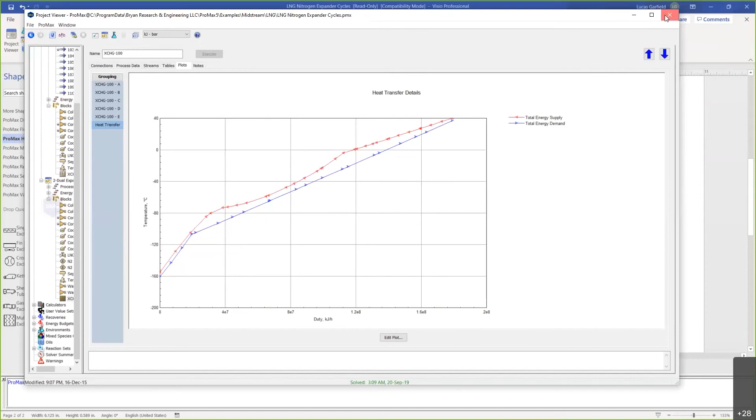But that's the nitrogen process, and we don't have too much more time left today, so we'll just talk about one more thing. I want to show you the difference between Peng-Robinson and GERG in this case.

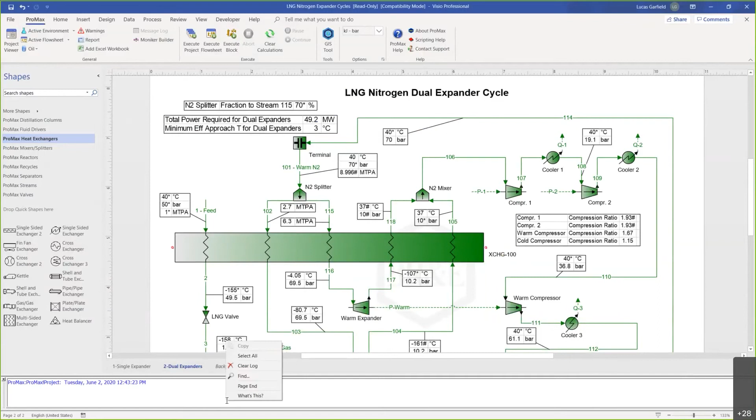Right now, if I click up here on Active Environment, I can see that the equation of state I'm using is Peng-Robinson. And here's the question: what would the difference be if I used GERG? Let's get some benchmarks first.

I'm going to click Clear Calculations, then Execute Flowsheet, because I want to see how long it takes to solve with Peng-Robinson. It takes 2.55 seconds to solve with Peng-Robinson, and my total power is 49.2 megawatts.

I'm going to make a little text box here with that as a note. With Peng-Robinson, it was 2.55 seconds to solve, and I got 49.2 megawatts of power.

Now let's go over to GERG and see what happens. I'm going to click here on ProMax, go to Active Environment, and change the package I'm using to GERG 2008 Equation of State. We'll click OK, and I'm going to solve this twice.

I'm going to click Execute Flowsheet once, and this solve is going to take a little bit longer because we have some solvers set up on the flowsheet, and because GERG is just a little bit different, it has to reiterate. Now I've gotten to a solved state.

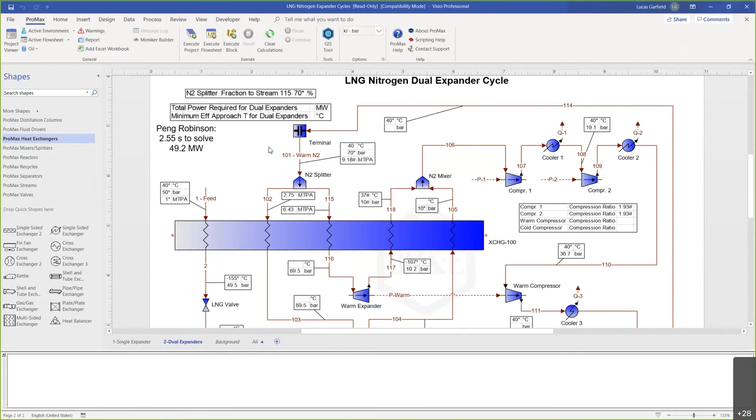Now my question is, from a solved state, how long does this take to solve? I'm just trying to get this to be apples to apples. So now I'm at the same place I was earlier when I did the timing benchmark for Peng-Robinson. Let's do Execute Flowsheet again and see how long this takes.

So 3 minutes, or 3 seconds, 3.14 seconds. That's actually not bad, 3.14 seconds to solve. We say in our slides and sometimes in our courses that GERG is a little bit slower, but practically speaking, it's not that much slower. You could probably, for something simple like this, just work in GERG full time.

And if you notice the duty, we're talking about 49.2 megawatts for Peng-Robinson, 50.1 megawatts for GERG. So not a huge difference. GERG definitely, if you can use it, I'd say there's no reason not to. But if you need to use a cubic equation of state, they'll give you pretty good results too.

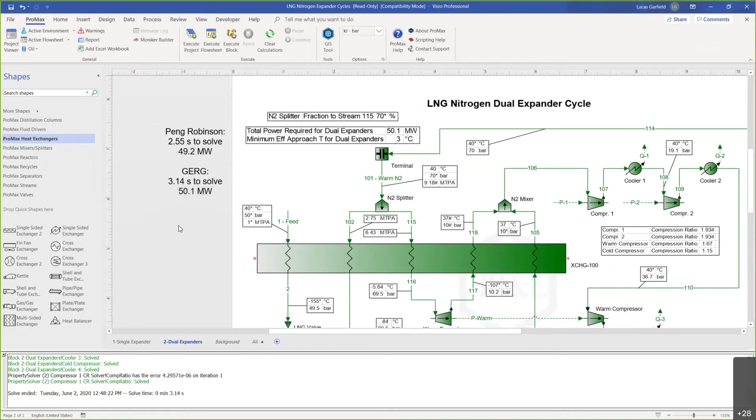Okay, there's a question: how do you go about choosing interstage pressure and flow rate for a multi-stage refrigerant cycle? Where is the refrigerant flow specified?

That's a good question. Let me go ahead and reopen - I shouldn't have closed it, but that's okay. I'm going to reopen the Cascade Refrigerant process, and I'll show you how that's done.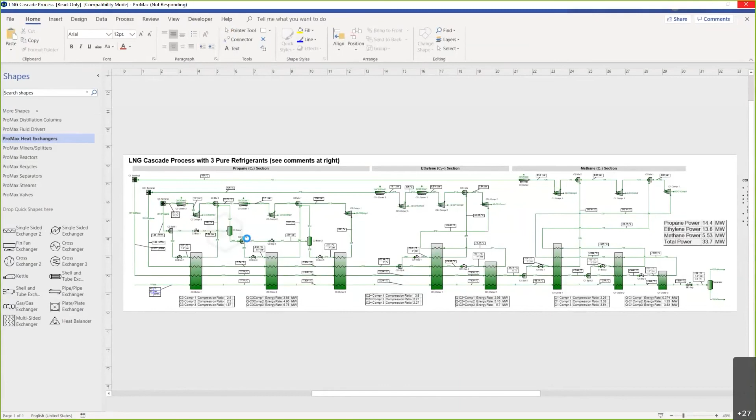So the interstage pressure choices are going to be kind of arbitrary. One of the things you've got to think about is how your compressor actually works. Typically you want to have a compression ratio in the range of 2 to 3, and can't have really, really high compression ratios, so you've got to balance the compression ratios from each of your stages. But if you're doing that, you still have a little bit of flexibility, and it is a bit arbitrary.

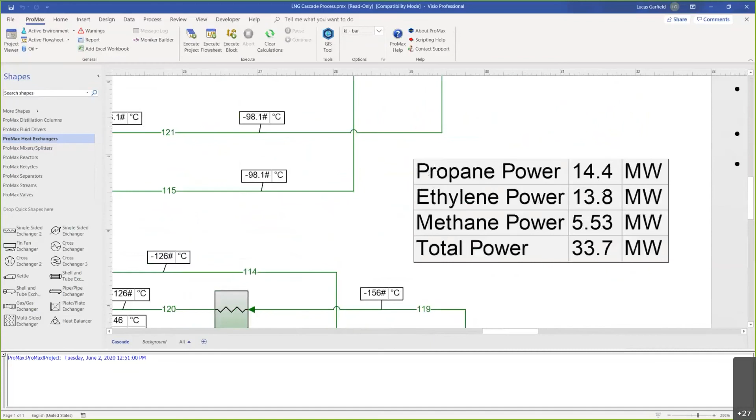What you'd want to do if designing the process is iterate over different potential interstage pressures and see which one is most efficient. So for instance, in this process right now, if I look at my total energy consumption, I should have that on the flow sheet somewhere.

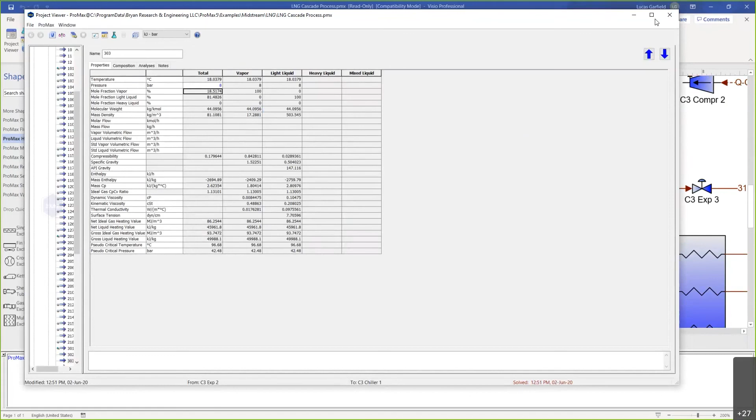Right now the power my propane system is consuming is 14.4 megawatts. Let's see what happens if we change one of our interstage pressures. We did our first expansion at 7.5 bar, then I changed this to 8 bar - a small change, not sure if we'll see a difference in power consumption, but let's try it. Remember, previously the power consumption from the propane compressors was 14.4. Now at that higher expansion, it's still 14.4 - we don't have enough significant figures here to see which direction it's changing.

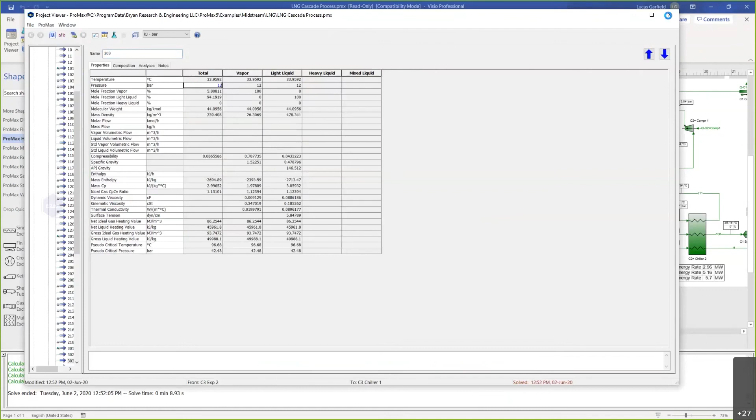But let's try this - this is coming in at 14 bar. Maybe we can expand to 12 bar. Again, these answers to questions are not rehearsed, but I hope it gives you guys an idea of how I go about using the simulator to answer questions.

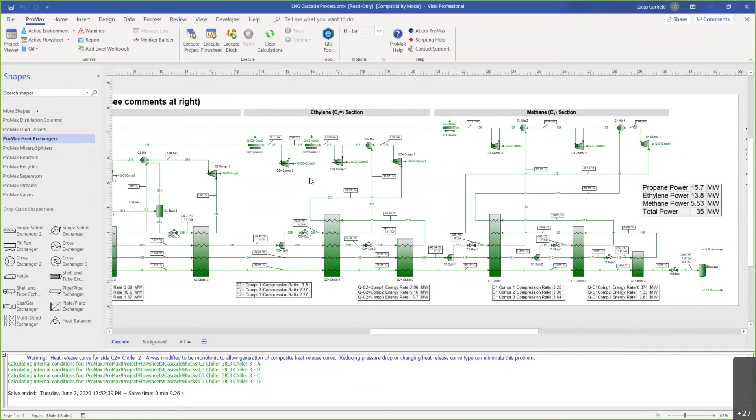Okay, now I see my propane power here is 15.7 megawatts. So in terms of choosing those interstage pressures, what we're really interested in is minimizing our compressor power. Raising that first expansion from 7.5 to 8 didn't make a big difference, but when I went from 8 to 12, now I'm consuming a full extra megawatt of power. So it's really just an optimization problem.

In terms of the flow rate, the way we've set this up - I didn't have time to explain this fully - we're using a special block called the propagation terminal. This is used when we have systems like a refrigeration loop where the process fluid is being recycled, but there are no losses - basically the system is closed. It's used for closed loops. This entire propane refrigeration loop solves simultaneously, algebraically.

The flow rate in this case is actually being calculated automatically based on the duty. We know the duty because it's what we need to cool these three streams. For each stream we know the inlet temperature, composition, and therefore heat capacity, and the outlet temperatures. So we calculate the duty based on what it takes to get these three streams down to 36 degrees Celsius, and then ProMax figures out that to satisfy that duty, we need a given flow rate - in this case 10,000 kilograms per hour. The flow rate is determined automatically based on the duty.

If that wasn't crystal clear, just let me know and I'll be happy to clarify.

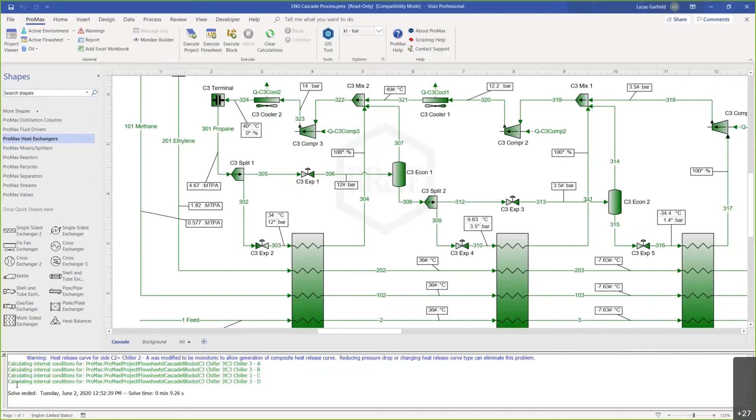Another question: is there any insight into how the effective mean temperature difference moves as the MR composition changes for SMR? Yeah, we can open our SMR and take a look at that. This is one of the things having ProMax available to you is fantastic for - if you want to develop an intuitive sense of how this heating and cooling curve changes as you change the composition of the mixed refrigerant, you can just do experiments. It's free to do experiments in a process simulator.

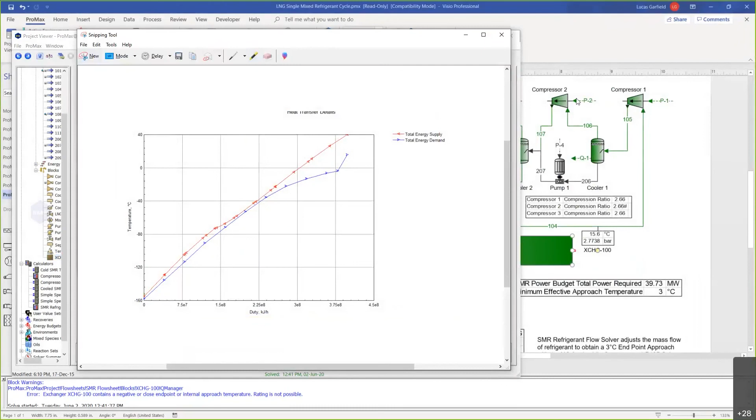So let's take a look at this curve right now, and I'll take a snip from it with the snipping tool. So this is what we've got. Now let's make some changes to the mixed refrigerant composition and compare it. Let's go back to where we were before - instead of having this 32% normal butane, let's take that down to 27, and then take our methane back up to 35. Then we can resolve this and compare the two curves.

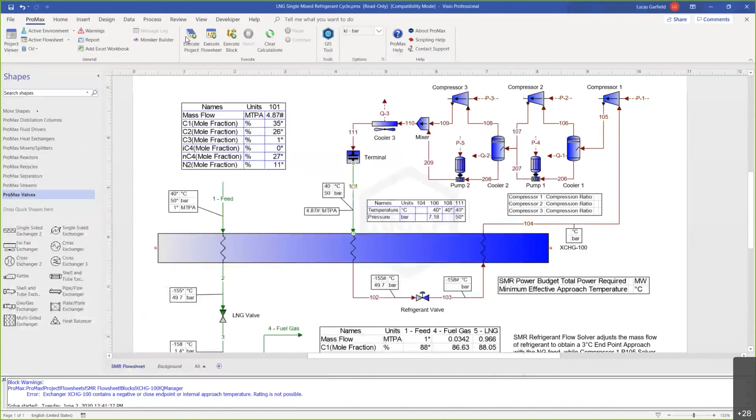Okay, so the curve on the left is the one with 35% methane, 27% butane. I'm going to load that snip back onto the screen. The curve on the right is with more butane and less methane. You can see the big difference here is that this section is smaller.

You can see that we've shifted things around here just a little bit. But basically I can't even imagine designing a mixed refrigerant process without something like ProMax. When you've got ProMax, you can just try lots of different compositions and really get a sense of how the system behaves and get those curves close together.

So I hope that was useful. Honestly, if you're really curious about this, I would encourage you to just open up this example just like I've got. You've got access to the same example and play with the composition just like I'm showing you.

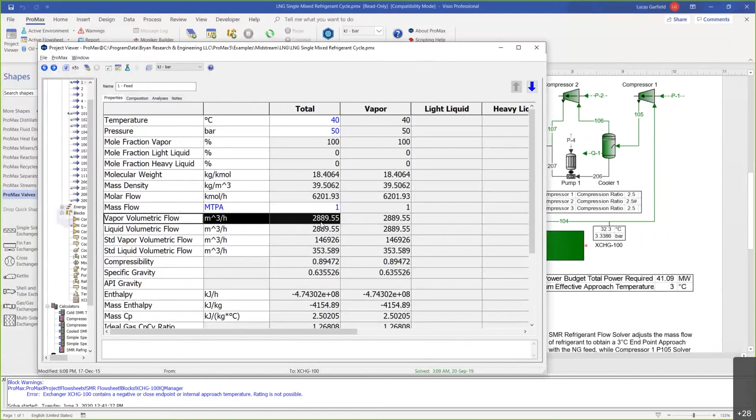Yeah, okay, I've got a question. Can we see what the actual volume change was from the feed to the final product? Sure. So if I open up the feed stream here, I go to the properties. Let's take a look at what the volume was. Now I'm interested in the actual volume, not the standard volume or the normal volume, but the actual volume. The actual volume flow was 2,889 cubic meters per hour in the feed gas.

And then the LNG, it's reduced to 237 cubic meters per hour. So in this case, it's a volume reduction of about 12.

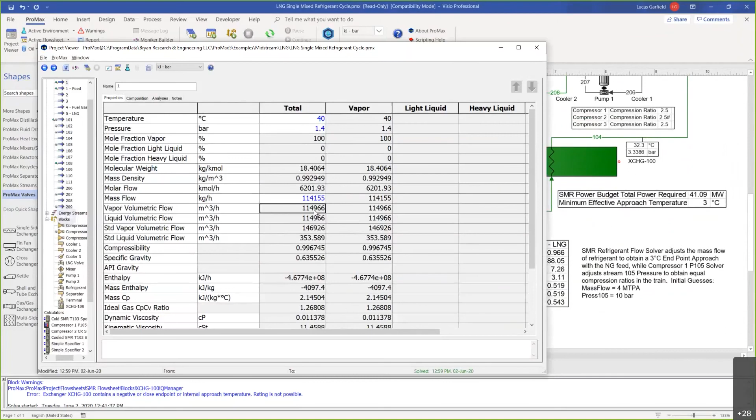When we said 600 earlier, that's obviously going to depend on the pressure that you're operating at. Here the feed was at 50 bar. If that feed was at 1.4 bar, the same pressure as the LNG, so I made a copy of that feed stream. This is the feed. I'm going to drop the pressure here to 1.4 bar. The vapor volumetric flow goes up to 115. So that would be, we can go ahead and calculate the ratio here. That would be 114, 155 over, I can't remember what the LNG was, 237.

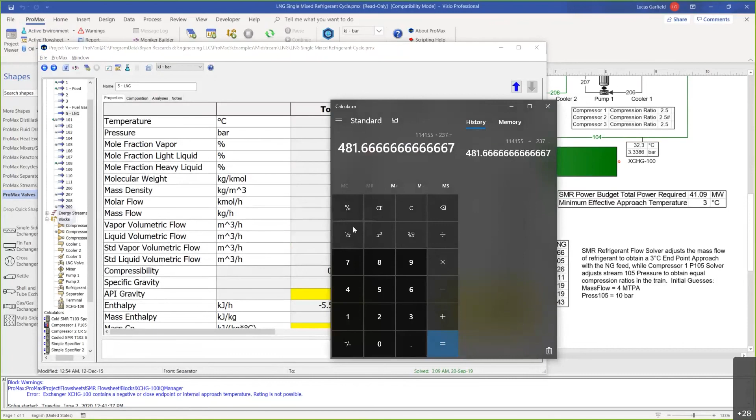So at atmospheric pressure, in this case, the volume reduction is about 482. Yeah, and good point, the 600 is probably for pure methane, so it's a little bit different here for this gas mixture, but still in the neighborhood of 600.

Hussein has asked, is any pre-treatment required? And the answer to that is yes. Like we discussed in the slides, very often pre-treatment is required to make sure that the heating value is correct, to make sure that we don't have CO2, that we don't have water, that we don't have benzene. But in the examples I've shown you today, we haven't touched on pre-treating because we're assuming that the feed has already been treated. Now, if you did need to do that pre-treating, ProMax is a great tool for that.

I could just show you an example. For instance, if I go here to the midstream gas processing folder, I can show you a GSP plant example. This would be a demethanizer that we would be using to do some pre-processing. I could show you amine sweetening examples. So I suppose the answer, Hussein, is yes, you're almost always going to require some pre-treating. We didn't touch on it today, but you can use ProMax for all those different pre-treating processes. So here, for instance, here's a simulation of a demethanizer. This would perhaps be some pre-treating that we could do before going to our LNG liquefaction train.